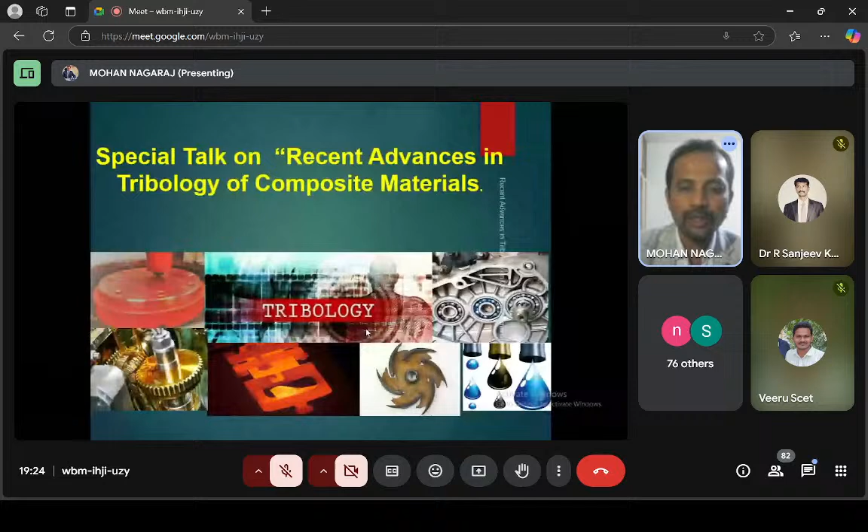So the introduction of tribology. Tribology means it is the science and technology of interacting surfaces in relative motion. It means one material rubs with another material, and there is progressive loss of the materials. It is called tribology. It includes the study and applications of the principles of friction, lubrication, and wear.

Tribology is the interaction of solid or composite surfaces exposed to interfacing materials and environment, which may result in losses of the materials from the surface. It is also loss of materials in lubrications, in the hip joint it is also loss of the materials. So these are all losses of the materials.

How to improve the wear losses? How to improve the wear resistance of the materials to avoid the losses in many applications.

So tribology means not only in the case of engine components or any environment, it's a process. Loss of materials is known as wear.

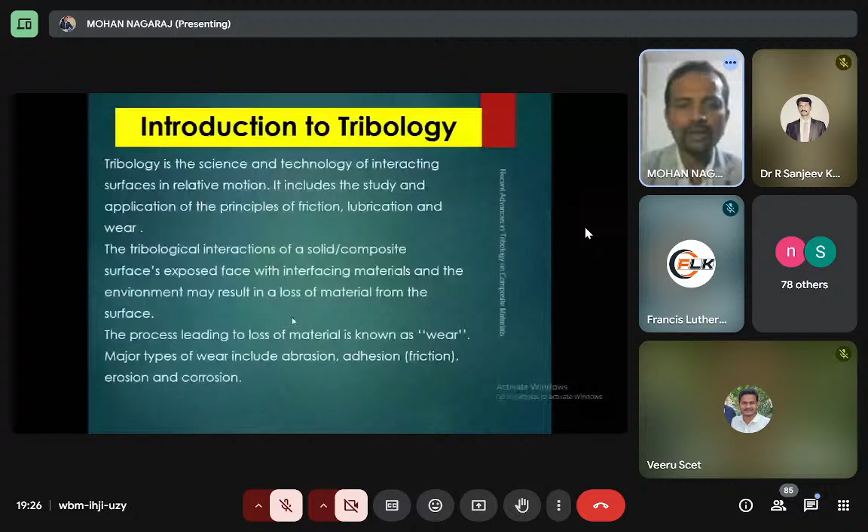So tribology means not only tribo. Tribo means there is some mechanical application on the components by means of pressure, by means of compressive force, or by means of tensile force.

There is a loss of materials taking place in different seals, gears, bolts, nuts, bearings, cams, wheel brakes, clutches, impellers, wheels, etc. These are all automobile components.

Some of the wheels have high friction coupled with low wear, as in brake pads and clutches. Sometimes the friction will be low with good wear properties under dry sliding conditions, again with smooth metallic counterparts.

For example, friction in bearing oils and gear conditions, engine oils in the gears - in automobile sectors we generally use oils and lubricants, but not in the case of brake pads and clutches. So generally, wear means it is the interaction.

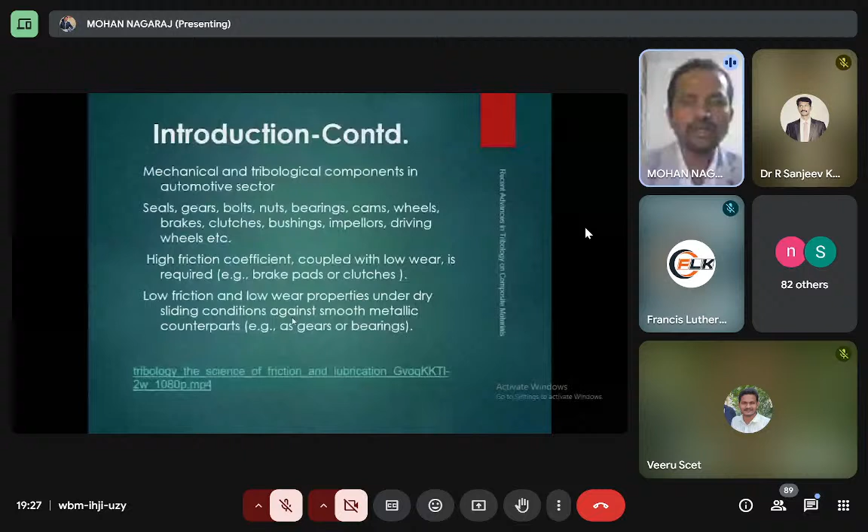So wear resistant materials are used in brake clamps, clutches, tires, and shoes - frictional heating, for example, initiating a fire by prehistoric peoples, and also in brakes, etc.

Simple example: eraser, friction surfacing - we are not using any lubricants, just enhancement of adhesion by means of the rubber, like an eraser, it's a material applied by pressure.

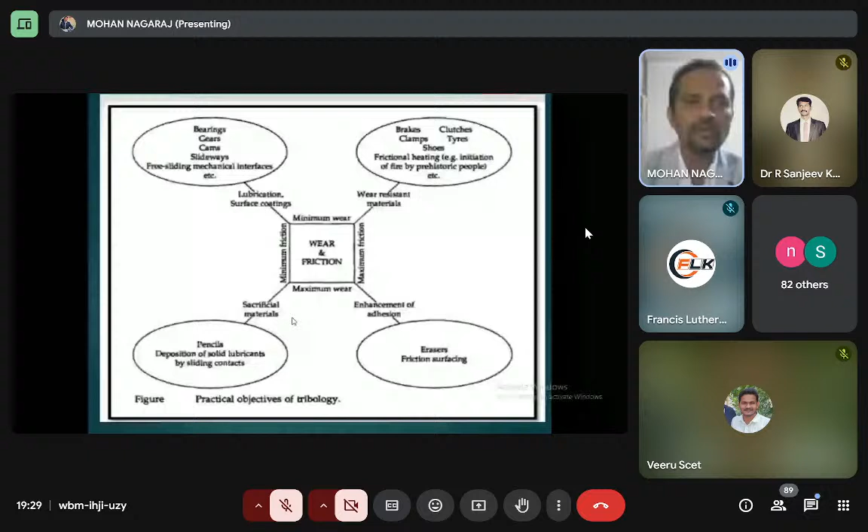So in our presentation, this is a special talk we are going to present, through understanding the tribological properties. Generally, as per our talk, it is related to composite materials.

First, let us understand what composite materials are. Composite means it is the macroscopic combination of two or more materials. It is called composite. There are different types of composite materials.

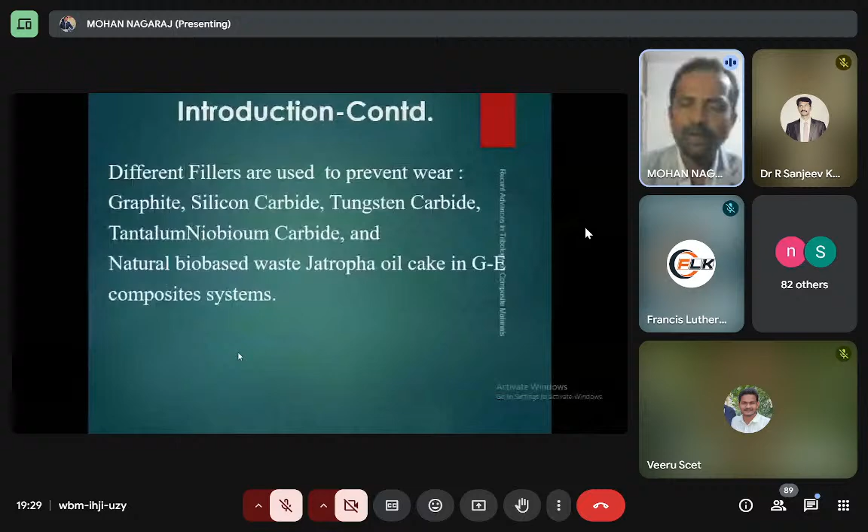In nature there is natural composite. In nature it is shell - in the seashores, calcium carbonate and its mixture. It is also one of the composite materials.

In general, composite materials are man-made composite materials. Recently it is used in aerospace applications. So generally, it is using glass epoxy composite. Generally, epoxy is one of the major usages of composite materials.

Usage of composite materials at present technology and present science also includes Kevlar fibers and carbon fiber. It is also one of the major applications in aircraft sectors - carbon fibers and also Kevlar fibers.

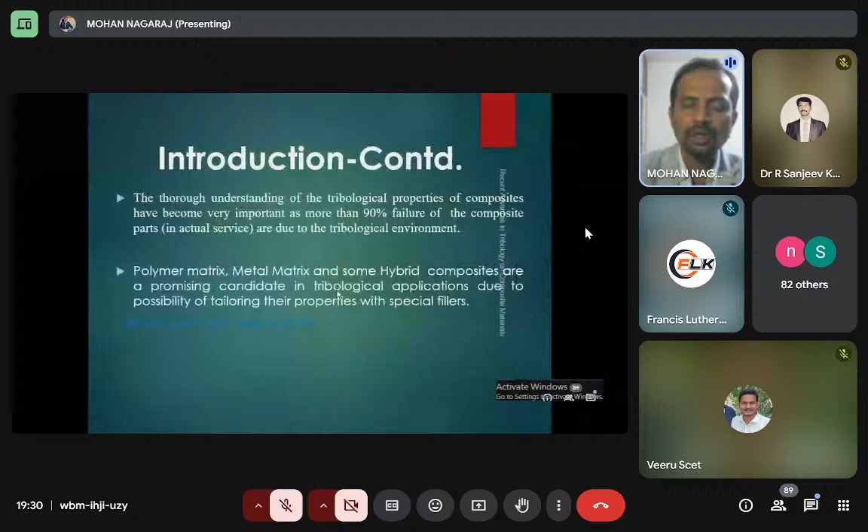So nowadays there is natural composite. Jute is one of the composite materials being used - jute, sisal fabric, sisal materials, areca fiber. These are all the materials used in the inner part of automobile sectors, and also in aerospace sectors. In shipbuilding industries it is also more being used.

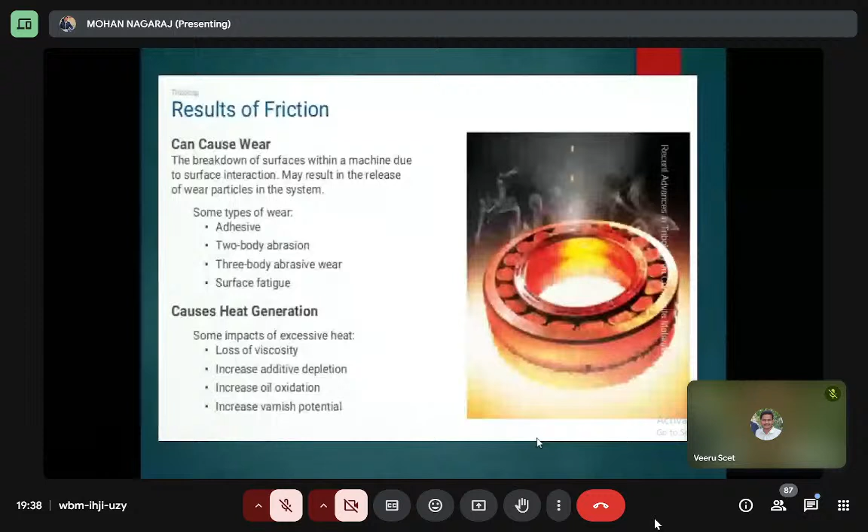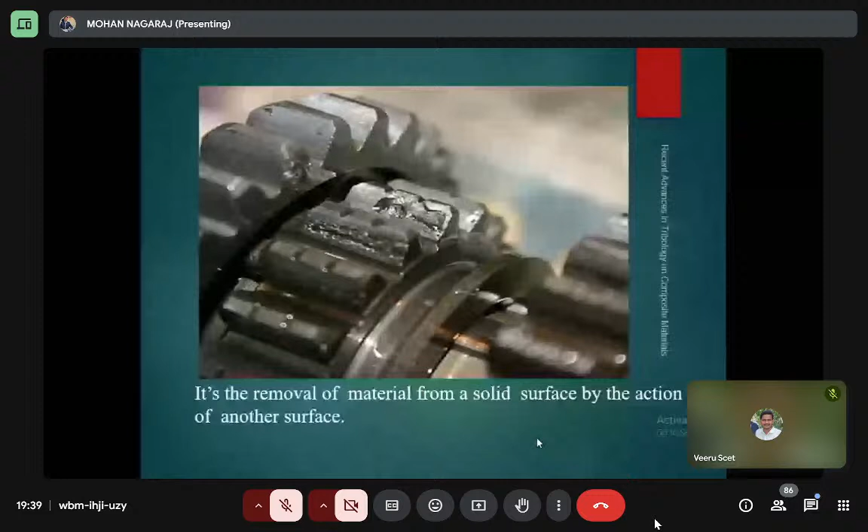So it's material removal from the solid surface by means of actions of another surface. It is the propagation of cracks, and the material will be fractured, in general, in the material.

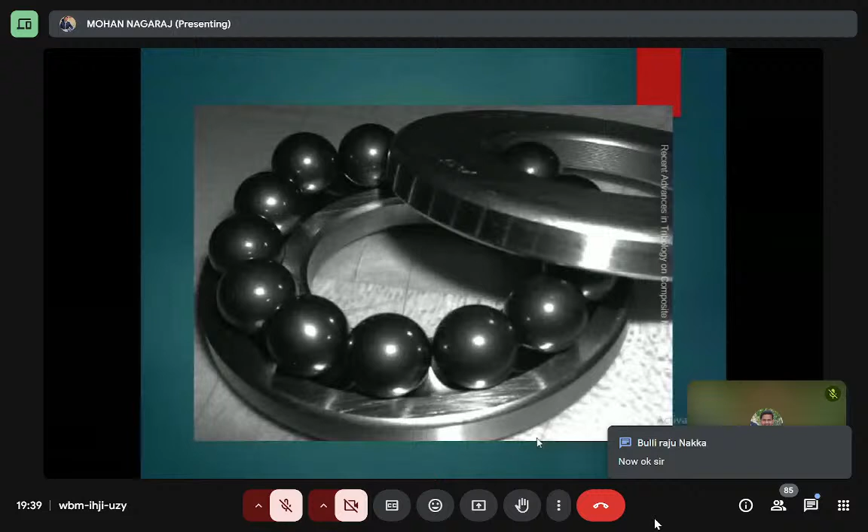Similarly, applying lubrication in between the balls and bearings, there is a bearing liner material, which is a composite material. Polytetrafluoroethylene is one of the materials. It's made up of glass fabric reinforced with polytetrafluoroethylene. It gives self lubrication in the bearing liner material.

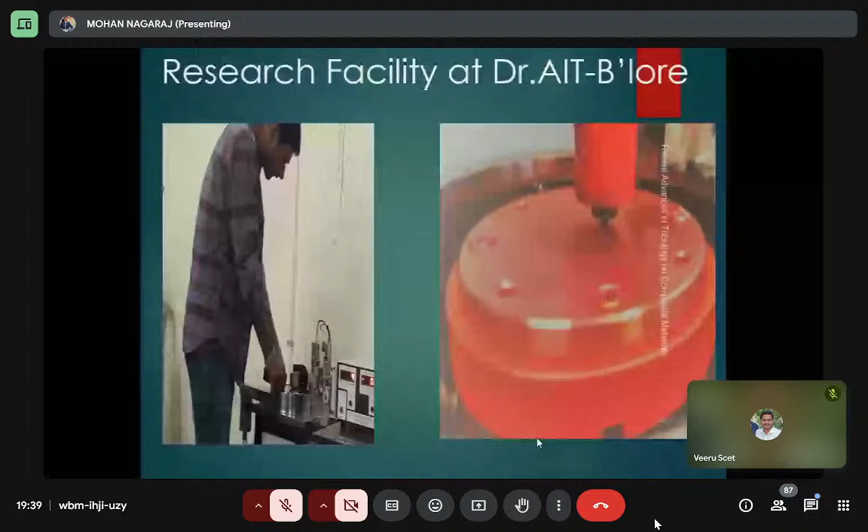So instead of lubrication, we are introducing a bearing liner. There is a research facility in our college: a pin and disk machine. We can test composite samples in the pin and disk machine, and erosive testing is also possible.

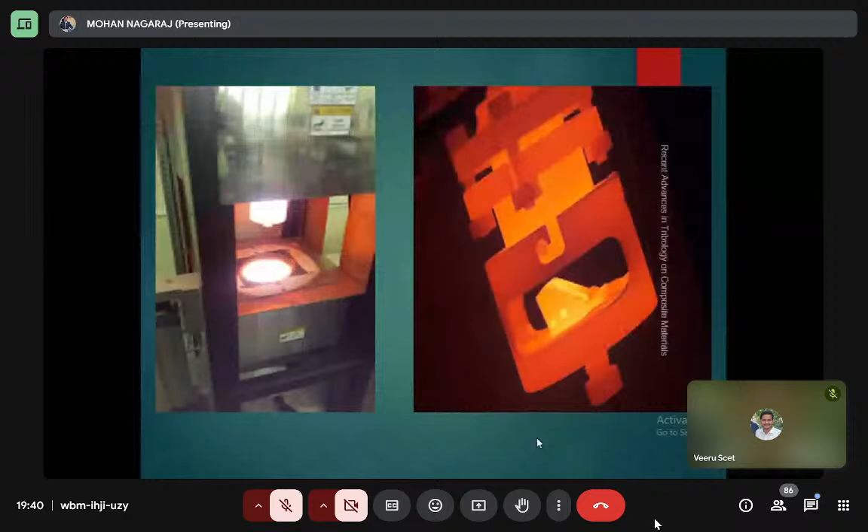There's a possibility to test erosion in high temperature environments. There is solid particle interaction with micromechanical actions of the solid particles interacting with the surface. There is progressive loss of materials, meaning the impact of solid particles generally removes material from the solid surface. Such a testing facility is also available. This is erosion, where erosion will take place.

I will show, before this, a two minute video. I will share the video.

We are Society of Tribologists, leading researchers in the field. Hello, visible? Sir, visible? Yes, sir, yes sir.

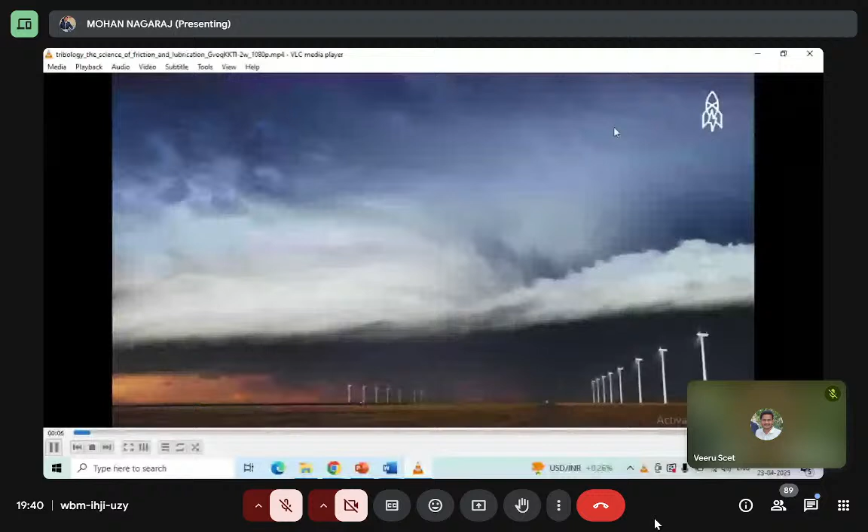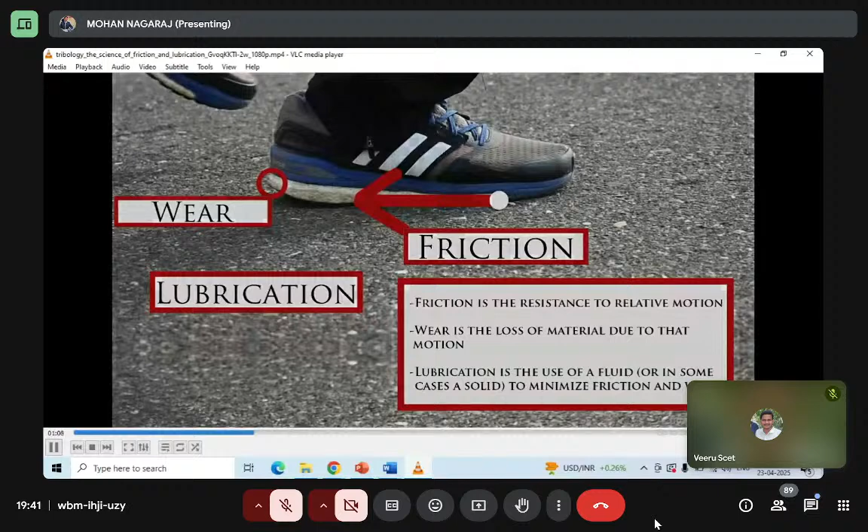Hear the word tribology, but you can see tribology in action on a daily basis with cars, wind turbines, and in sports as a few examples. You'll see it best in applications with sliding, just like here, where if you zoom in with microphotography, you'll see the top steel plate sliding across oil. As you can see, the oil separates the two steel surfaces. This right here is tribology. It is the study of surfaces moving relative to one another. So when surfaces are rubbing together, we tribologists look at three things: friction, wear, and lubrication. Friction is the resistance to relative motion. Wear is the loss of material due to that motion, and lubrication is the use of a fluid, or in some cases a solid, to minimize friction and wear. Now the cool part is seeing tribology come alive through our research. Check this out. When your finger rubs against the surface, basically the sliding force of your finger acts against the friction from the surface. Now with our research, we can put numbers to that friction. Watch this. Instead of a finger, let's look at a steel ball rubbing against a steel plate.

As the ball rubs across the surface, data is being collected. At every location, we are getting the coefficient of friction. For example, at one location, the friction coefficient is around 0.17, and at another location, it's 0.15. Altogether, the data shows the average coefficient of friction is around 0.16 for the surface.

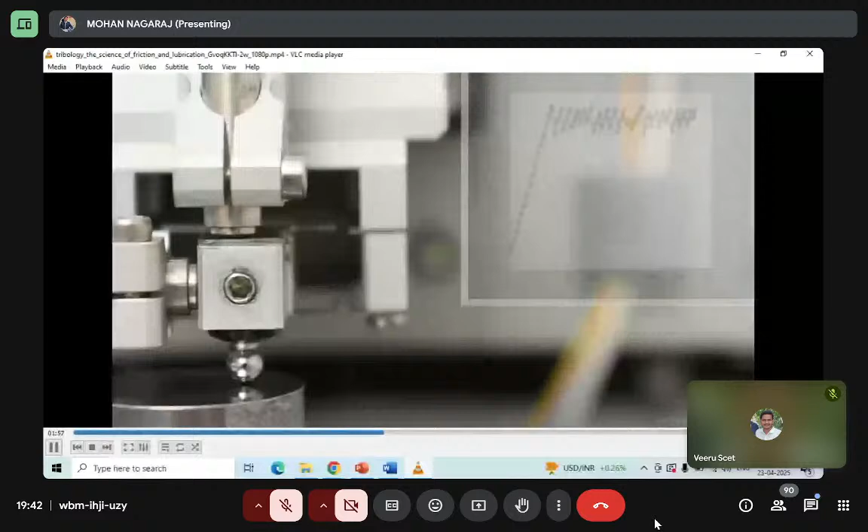You can think about what you've learned in class and apply it. How can we control friction? How can we control wear? Can we apply lubrication? Today, our research group helps answer these questions.

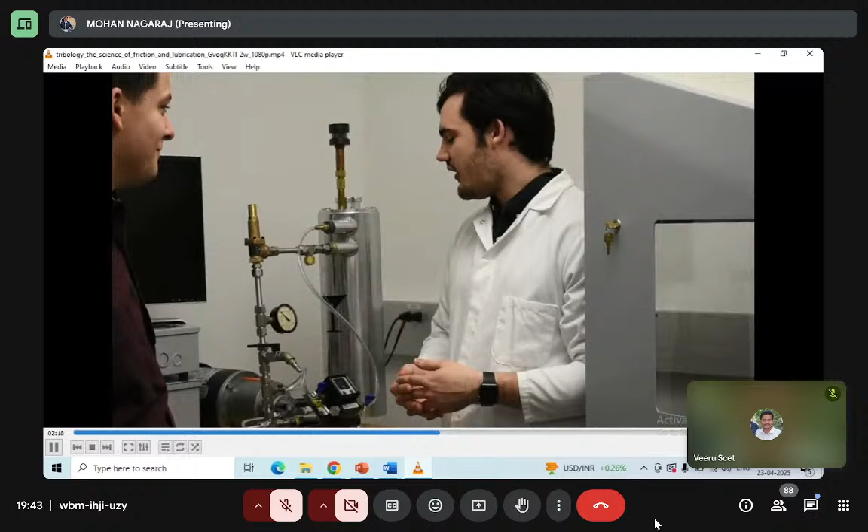Each sample we create here has different additive combinations, meant to keep the oils stable throughout varying temperatures and in the long run. We also make sure these oils don't produce foam. Once foam starts developing, you have bubbles which exclude the oil, and the materials rub against one another, producing wear, and you lose energy from friction.

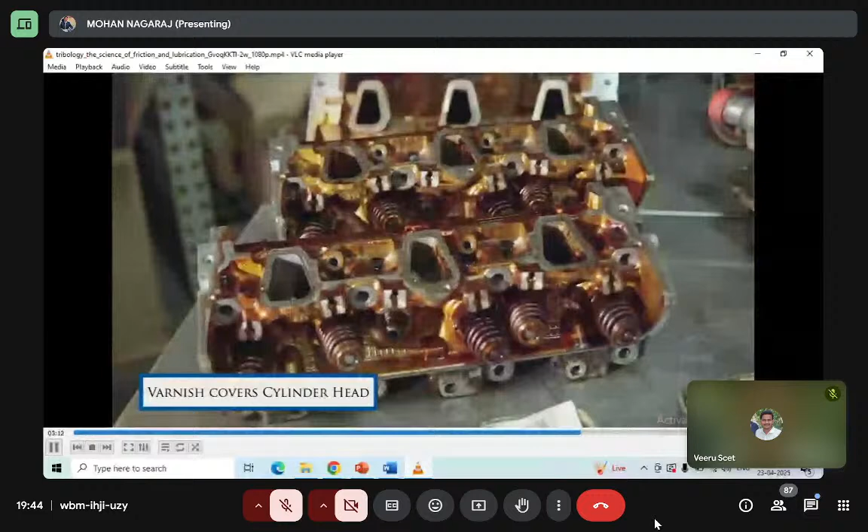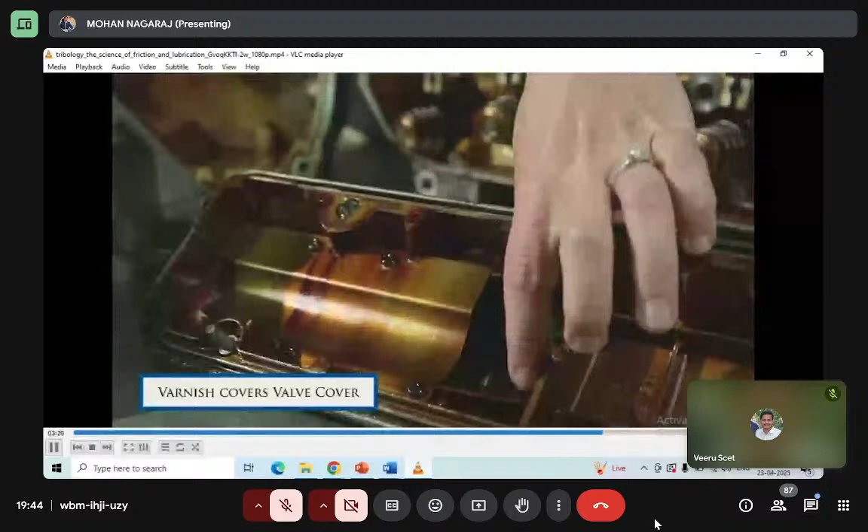Oil degrades, and one of the main degradation channels is oxidation. This is a problem across every industry, the transportation industry and the power generation industry. We take artificially degraded oil on a steel component, expose it to differing chemicals and environmental conditions like temperature and flow rates, to see if we can remove the varnish.

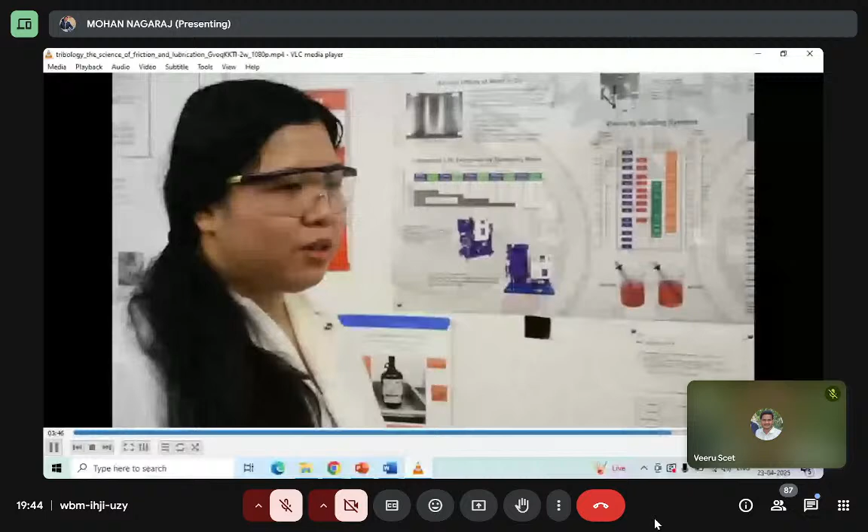I work with lubricants. That's my topic in tribology, in that giant umbrella field. With my computer science knowledge, I do simulations. I model base oils, essentially oils that formulate lubricants, and calculate their viscosity. Ultimately, if we can predict viscosity using computers, that would be really helpful for formulating new lubricants.

As you can see, tribology is both technologically relevant and scientifically fascinating. One thing's for sure: get ready to be a part of this growing field of research.

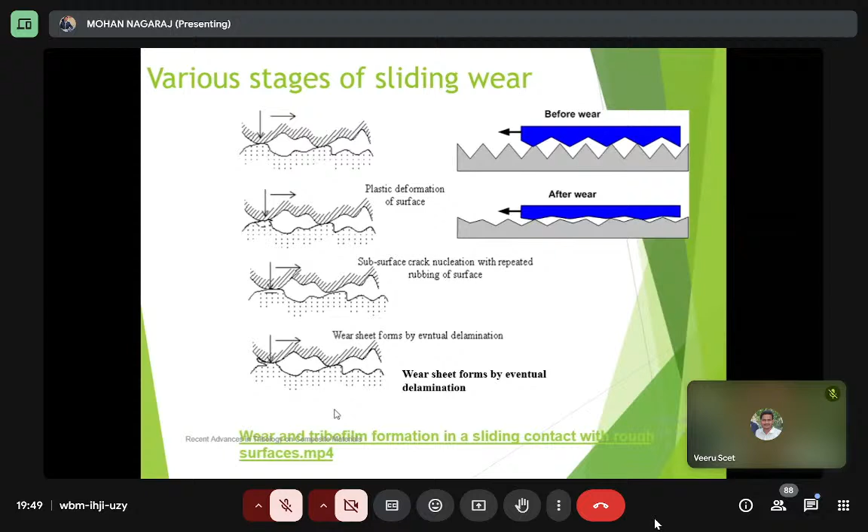Okay, so this is the various stages of sliding wear. I hope all of you can see in the shape. So abrasive wear: two body wear and three body wear.

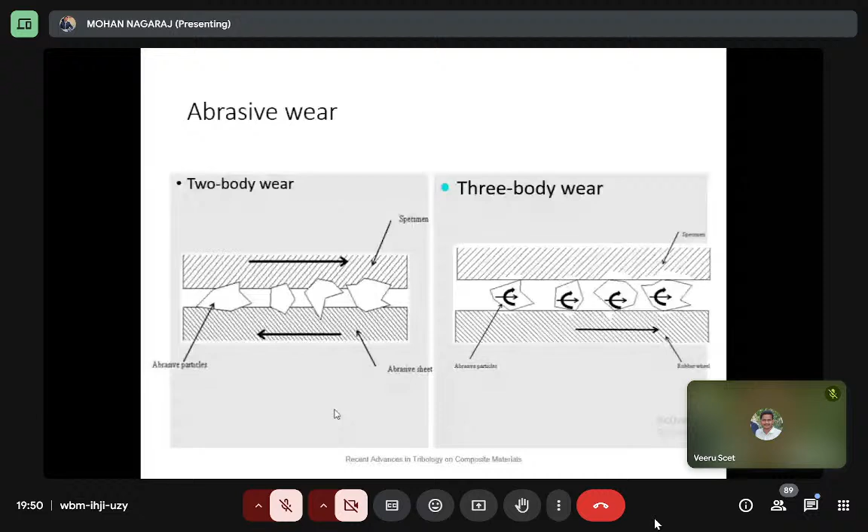Two body wear means there are particles, abrasive powders that will be fixed in the particular junction. And three body means there is movement of particles between the two bodies. So erosive wear mechanism: properties of the target materials are composition, structure, fiber filler matrix, and erodent.

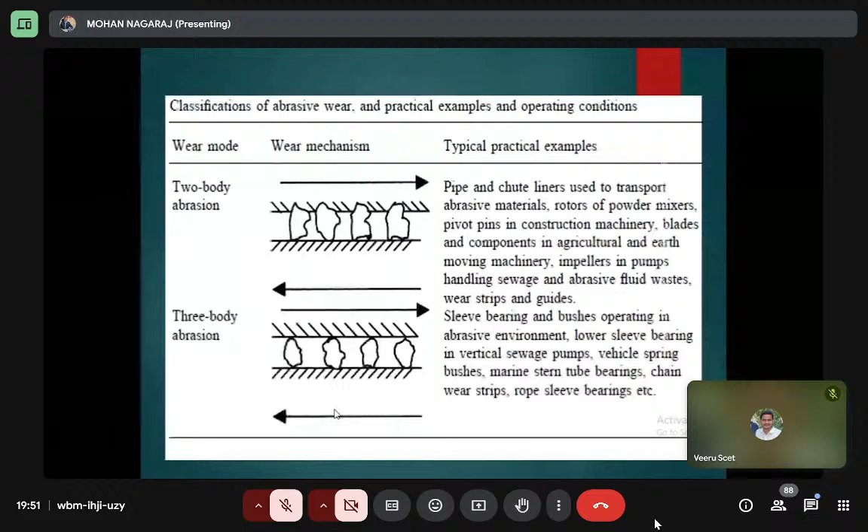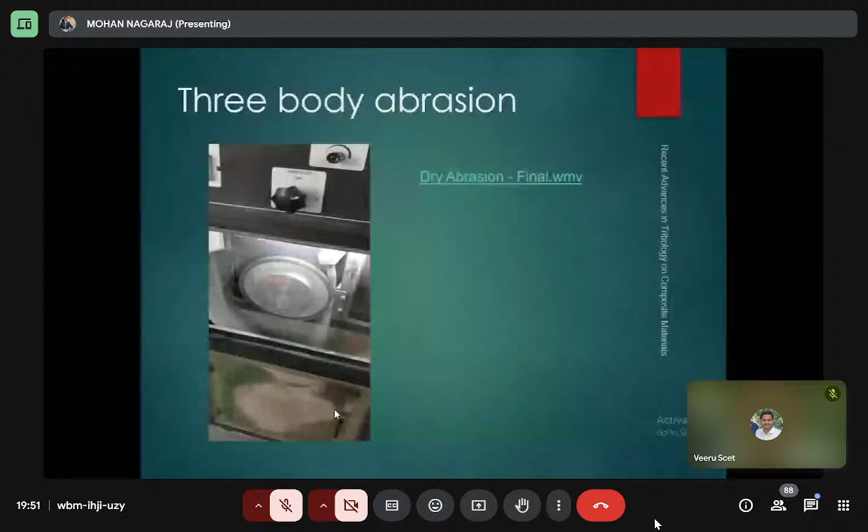I'll show this video after the session. This is erosion in vehicles and plants - aircraft moving in the desert environment or in the open atmosphere.

So the rotor blades and jet engine turbine blades are also worn out. These are the causes of damages - it is due to dust and sand, and also radomes. It covers the radar, it's called radome, and damage will also take place. Wing leading edges are also damaged.

Satellite surfaces face atomic oxygen and space debris. In power plants, generally piping, fitting, cyclones, valves, and also turbine blades. In boiler plants, damages occur due to charcoal moving at different velocities.

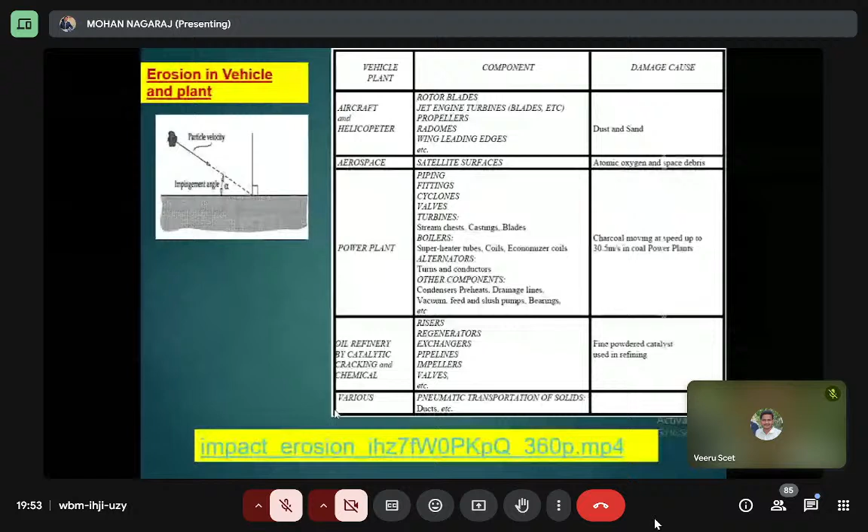In the oil refinery and chemical plants, there is riser, regenerators, exchangers, pipelines. A fine catalyst is used in refining. Here erosion is also chemical in the environment due to chemical reactions, and oxidation takes place, forming a film on the surface of materials.

This reduces the strength of materials after a prolonged period of time. This is known as corrosion, where it will take place.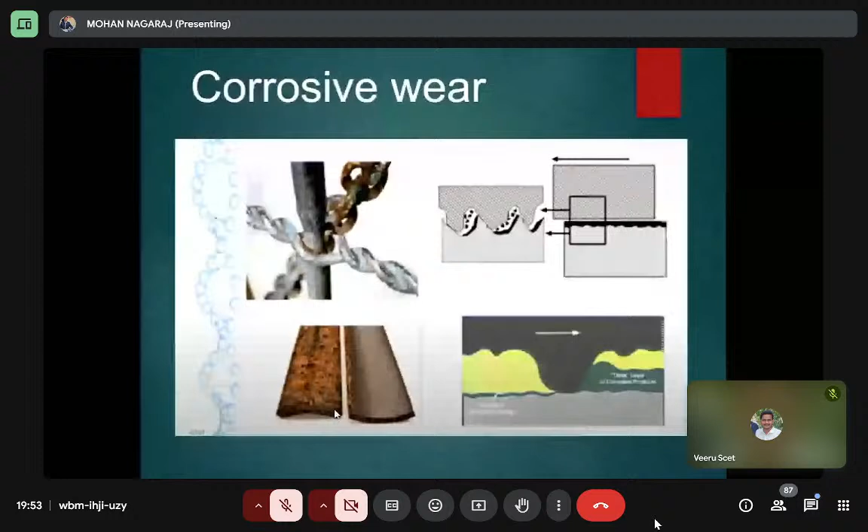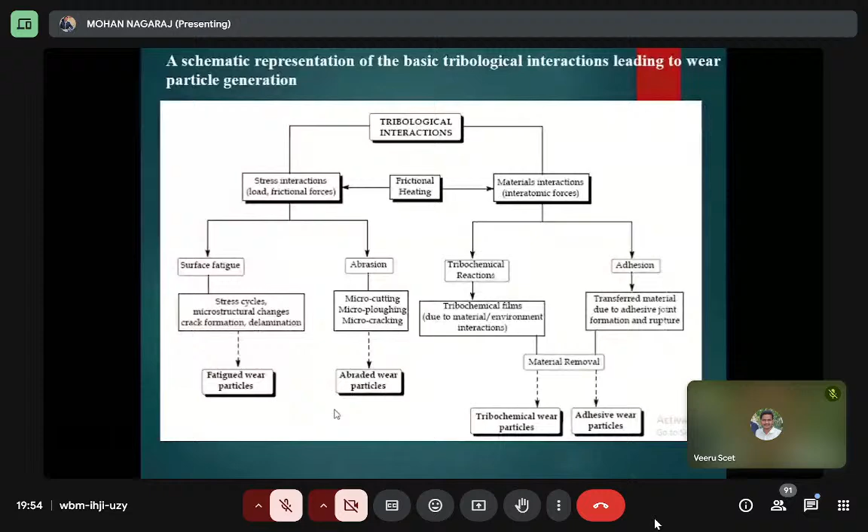So, adhesive wear particles - this is the general applications of fiber reinforced plastics in different fields, such as bearing liners. Polytetrafluoroethylene materials are used in the case of bearing liner materials.

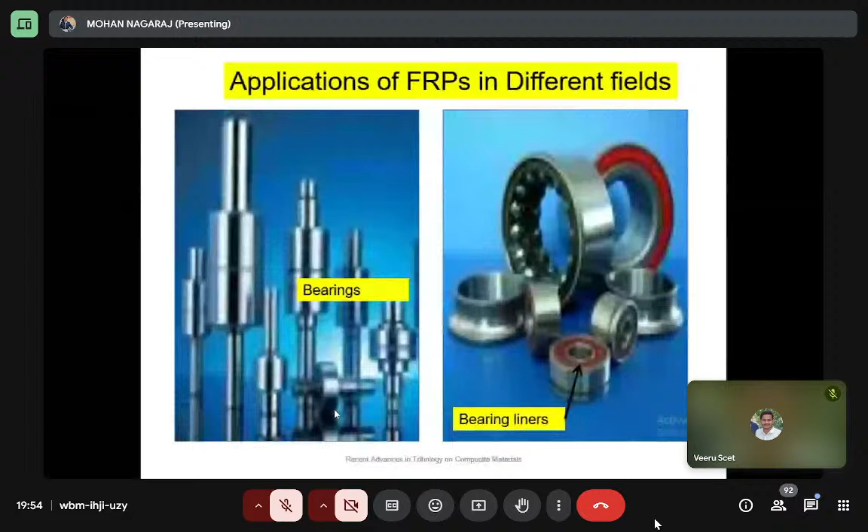Generally, instead of oil or ink, self lubrication takes place. This is generally made from composite materials. Applications of fiber reinforced plastics in different fields.

It is used in wind turbine blades, chemical pipes, pipelines - on all surfaces, where wear and tear will be taking place in the materials. To avoid such things, we are using some kinds of filler materials in the polymer matrix composites.

Applications of FRPs in different field sections include helmets, and electrical applications are also using it. In tires, they are using some kinds of fillers. In aerospace, marine applications, sailboats, automotive and other applications in chassis, carbon fibers are used.

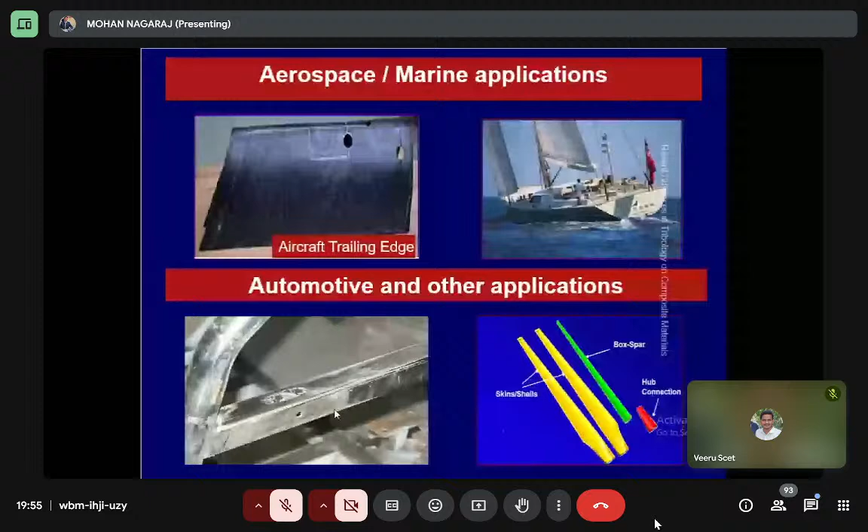They are used generally in automotive and other applications, and also in bumpers in trucks - materials called fiber reinforced synthetic fibers are used.

So in the present investigation, the role of graphite - graphite is one of the non-metals but a good conductor of electricity, and it acts with self lubrication properties in the material.

Silicon carbide and tungsten carbide are hard powders also introduced in the polymer matrix composites. This enhances the wear resistance properties, studied in sliding wear, abrasive wear, and also erosive wear environments.

So generally, Jatropha is one crop under cultivation. After crushing the Jatropha, it is used like diesel in the engine. After obtaining the husk from Jatropha, those particles are also used in glass epoxy composite materials with different combinations and percentages, which also gives enhancement in wear properties.

Mechanical properties were also studied, sliding wear behavior was also studied, and solid particle erosive wear behavior was also studied using filler-filled glass epoxy composites.

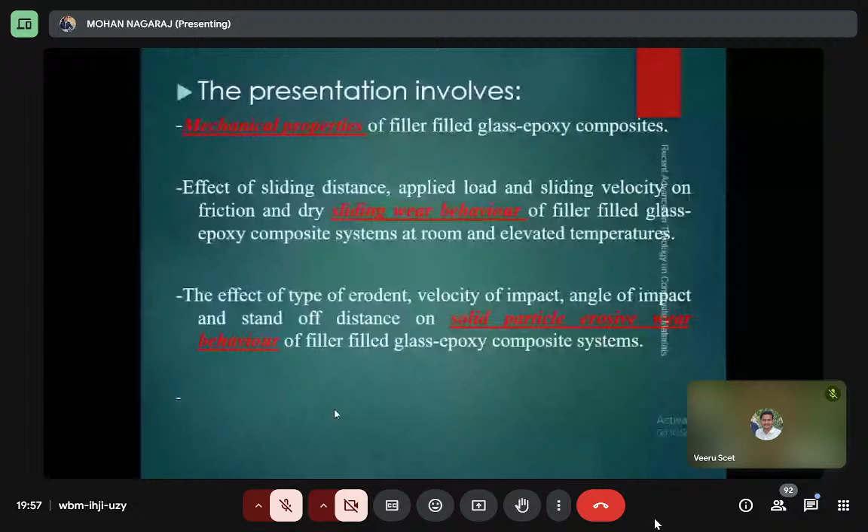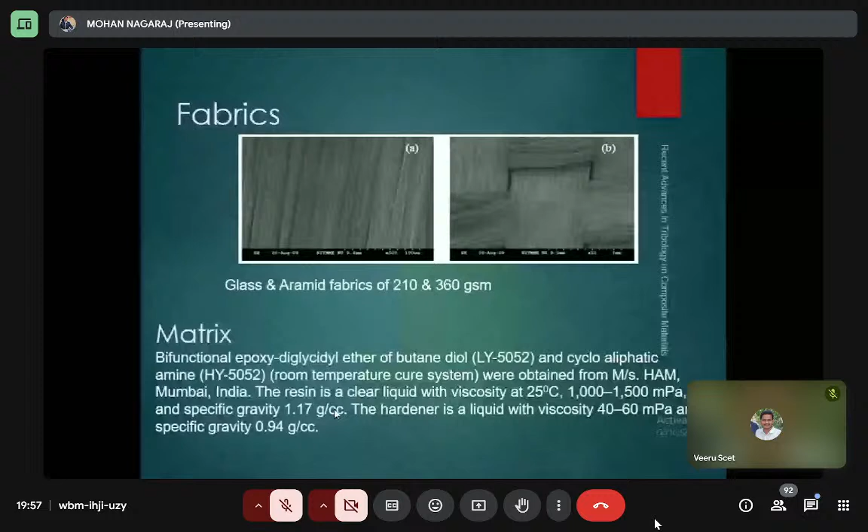Before fabrication - glass and aramid fabrics of 210 and 360 GSM, using a bifunctional LY epoxy. Epoxy matrix material is used for the fabrication of polymer matrix composite materials. Filler materials are used in this study, purchased from different organizations.

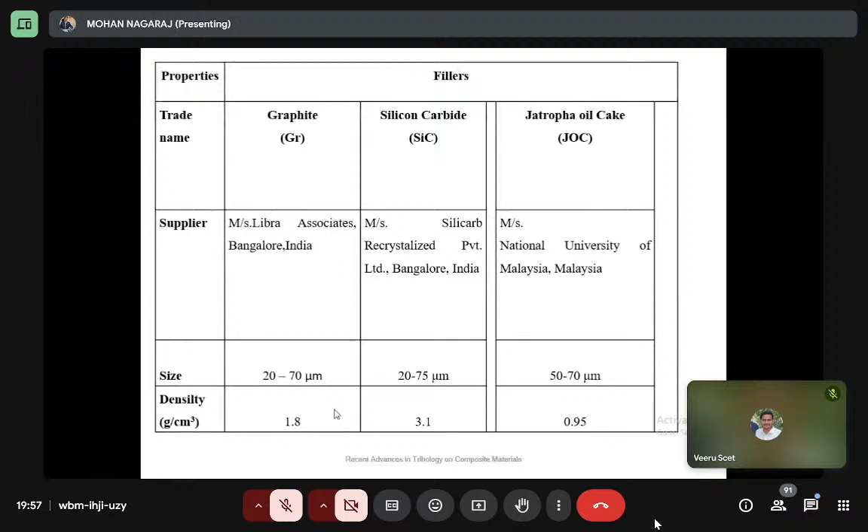Next, the fabrication methodology of nanocomposites - if you use nano fillers, it is called a nanocomposite. If you use micron level fillers, it is called a general composite material.

Fabrics are cut into required dimensions and placed in the mold, mixing the epoxy resin with the filler. Epoxy is generally an adhesive - what you use for joining pipelines and such things, that is the material called adhesive, similar to epoxy.

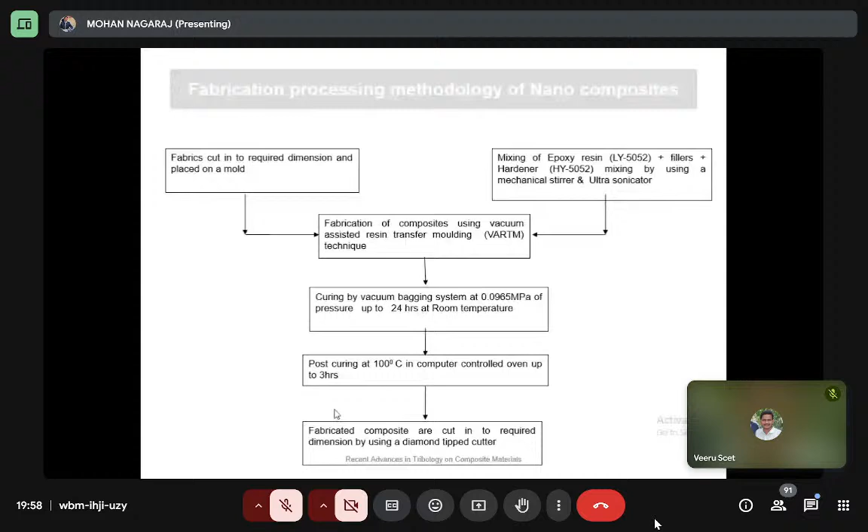These are manufactured using vacuum-assisted resin transfer molding technique, then cured by a bagging system at 0.0965 megapascals for up to 24 hours at room temperature, and then post-cured in an autoclave up to 100 degrees Celsius in a controlled oven for up to 3 hours.

Fabricated composites are cut into required dimensions using a diamond tip cutter. So after this is the schematic diagram.

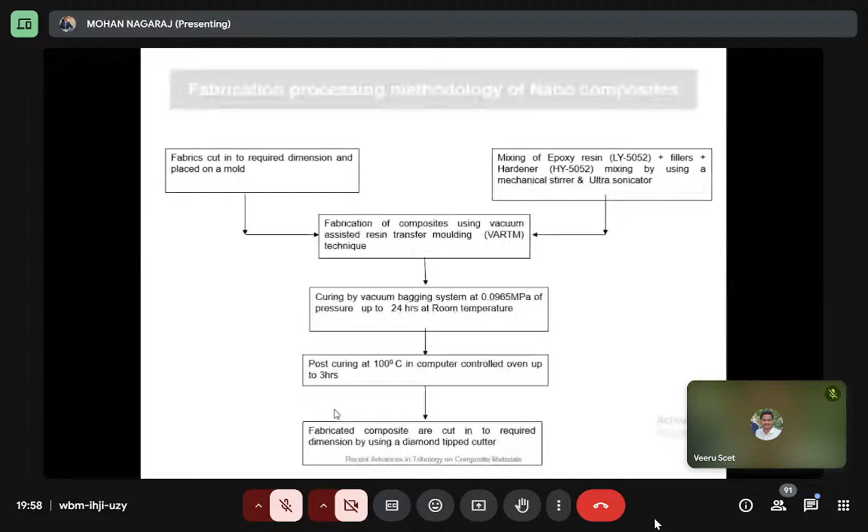The filler is ultrasonicated in the resin. After that, you are pouring these materials into fabrics. After that, the fabric is cured in the hot compression or vacuum assisted resin.

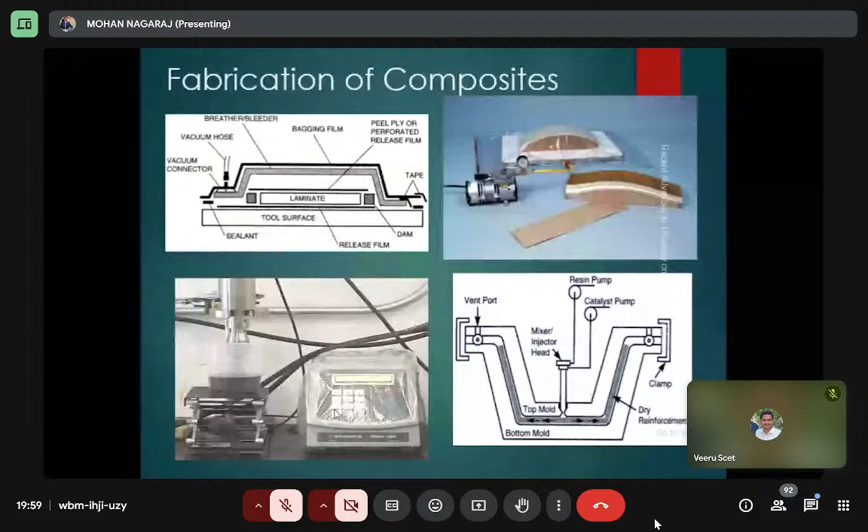One of the technologies used in the aerospace sector for the past 20 years involves a granite molding tool, dry glass fabrics or Kevlar fabric, any type of fabric, with peel ply and breather material on one side. The vacuum sources suck the resin, which is mixed with some kind of filler, then vacuum is applied. The pressure develops between the fabrics, so the material becomes embedded in the breather, and excess resin is observed in the breather outside the materials.

Following ASTM standards, tensile, impact, and wear tests are conducted.

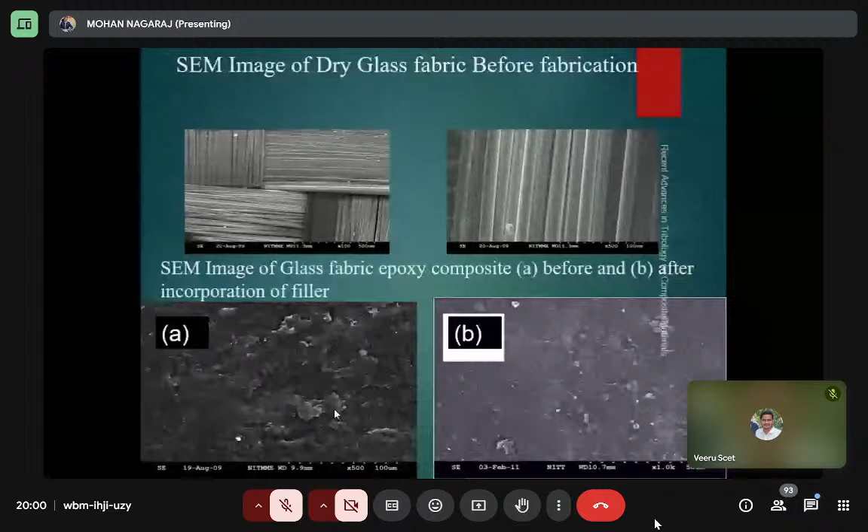These are SEM images before fabrication and after fabrication, after incorporation of the fillers in the materials. Here the impact strength is studied for filler-filled composites. Graphite gives more impact strength and more hardness compared to normal glass epoxy composite materials. These are the test conditions: dimensions of the specimen, applied load, angular speed, sliding diameter, and sliding distance.

These are all general simple parameters. We are not using any orthogonal array or other techniques here. The disk is made up of 55 HRC. This is the high temperature pin-on-disk machine, available at the National Institute of Technology and also at Dr. Ambedkar Institute of Technology.

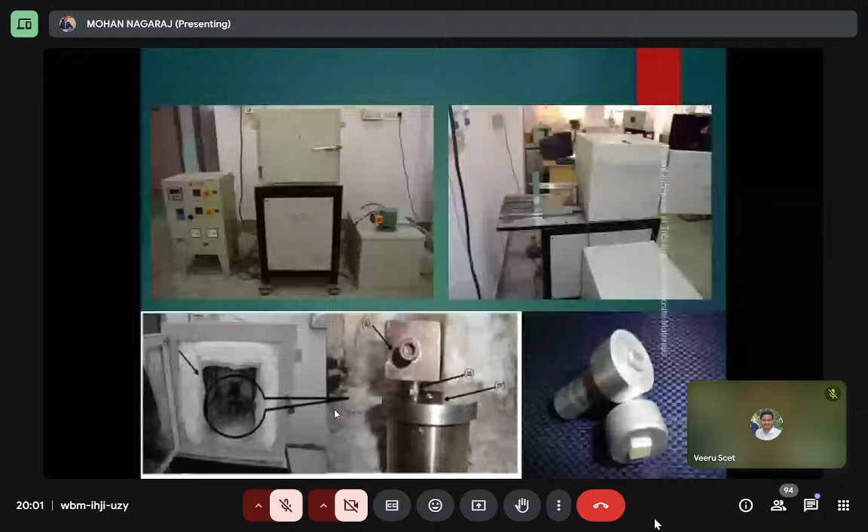Small pin samples are made and fixed in the holder, then run according to the load, which is 10 to 20 Newton, with revolutions set at a fixed value for the sliding diameter. pi DN by 60, and velocity is set. So this is the material.

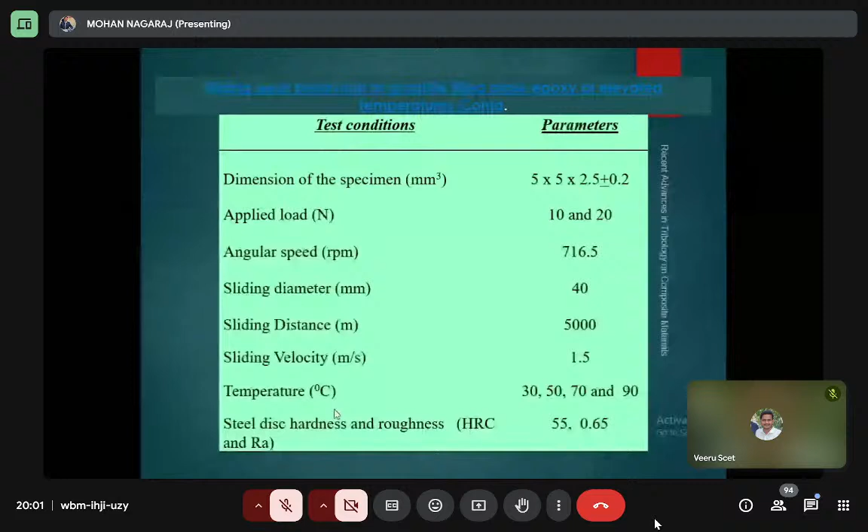We weigh the sample to get the weight loss of the material. The weight loss is tracked at different temperatures for the polymer matrix composite. It gives very good wear resistance compared to general materials, because lubricant-like materials such as graphite enhance the wear properties of the materials, giving very good wear and tribological properties. Generally, these kinds of materials can be used in bearing liners.

Instead of polytetrafluoroethylene, which is costly, why use filler materials? For cost reduction. Incorporating filler materials for the polymer matrix composite gives cost reduction and also improves the mechanical and tribological properties.

Here we studied up to 90 Celsius, but we can go up to 200 degrees Celsius depending on the matrix. Since epoxy is the matrix we are using, it withstands the glass transition temperature of the epoxy matrix up to 150, 160, or 120 degrees Celsius. If you use a phenolic composite, you can use it up to 300 degrees Celsius, possible for engine components of the matrix.

This is the specific wear rate versus temperature. Here, glass epoxy composite versus graphite-filled composite: the graphite-filled composite gives a very good specific wear rate, initially drastically lowering the specific rate. After increasing the temperature, the specific rate also increases, but it remains low in this graphite-filled composite.

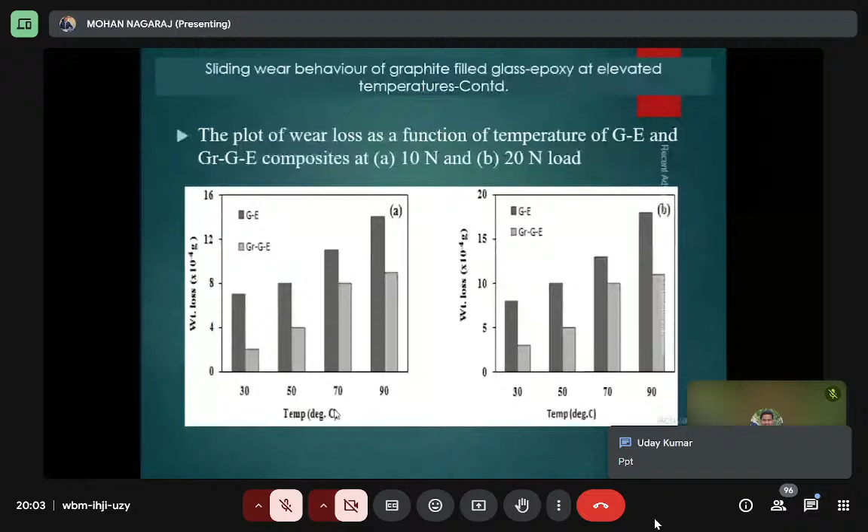Coefficient of friction is also a very important phenomenon we studied in the graphite-filled composite materials. Graphite-filled composite gives a lower coefficient of friction because, as a solid lubricant, it forms a thin film between the two components. This enhances wear resistance and the thin film formation between the composite specimens gives good lubrication properties. There's no need to add any extra lubrication; it's inherent in the property of the materials.

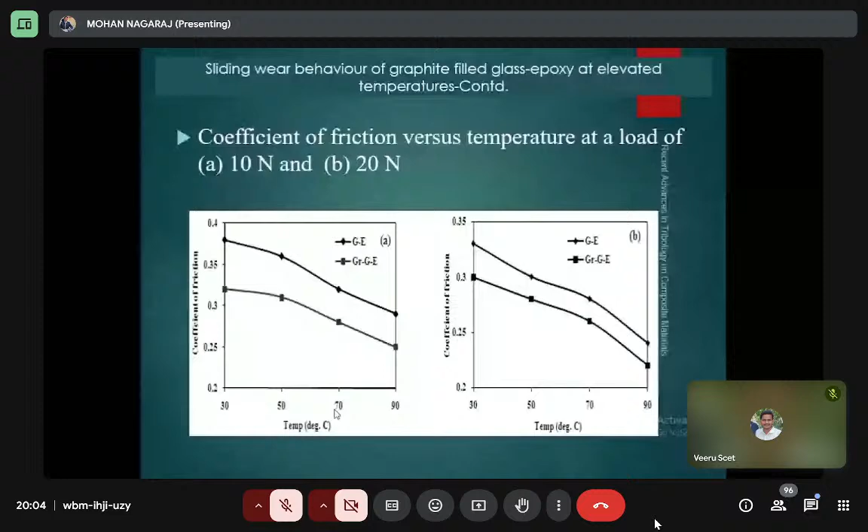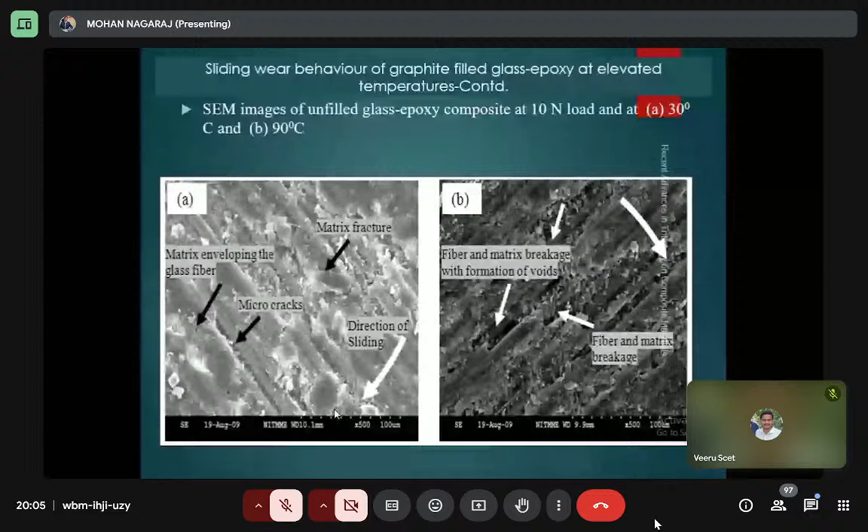At higher temperatures, the damage becomes greater. Higher damage shows broken fiber ends in the form of chipped features and worn out main layer damaged surfaces.

Some images again of filled glass epoxy composites, and this one of graphite filled composite. It gives very good lubrication properties and also protects the polymer matrix composite from wear, making it more wear resistant because of the solid lubricants, and also reduces friction between the two materials.

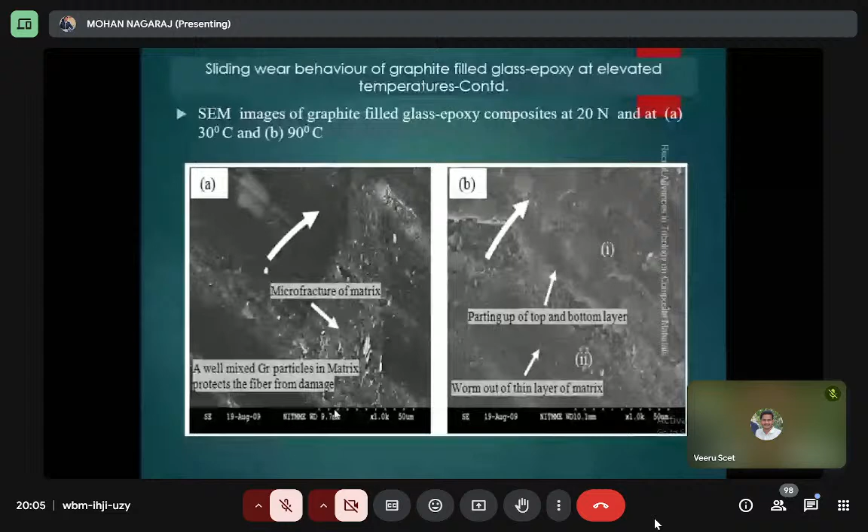So the summary of this kind of testing, this kind of research with applied load - the wear performance of unfilled glass epoxy composite showed strong wear mechanisms, which we observed.

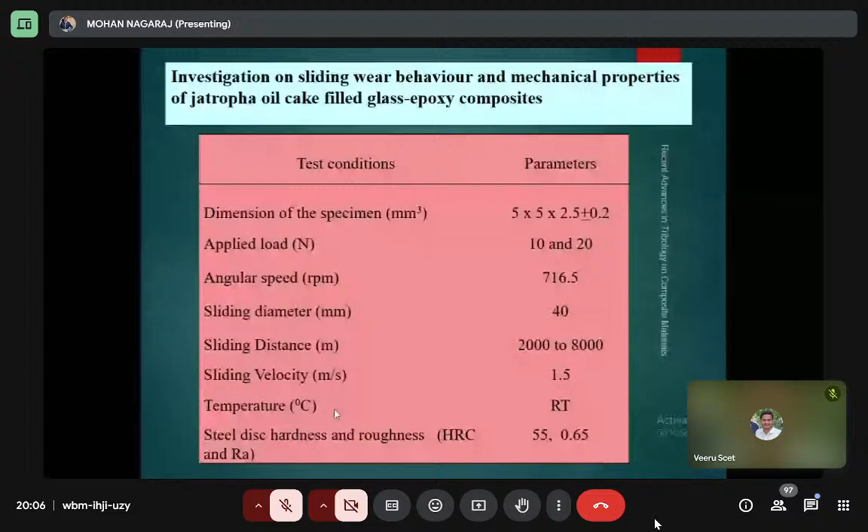Again, the investigation involves introducing Jatropha oil cake material in the same sliding conditions and same parameters at room temperature, not high temperature. We observed this glass epoxy composite with filler as Jatropha up to 6%.

This is the natural composite with natural filler. After extraction of the oil from the Jatropha, we are using the Jatropha oil cake powder as filler.

These specimens were tested according to ASTM standards. Here is the Jatropha filled material, and A is the general composite material compared to the filler filled one.

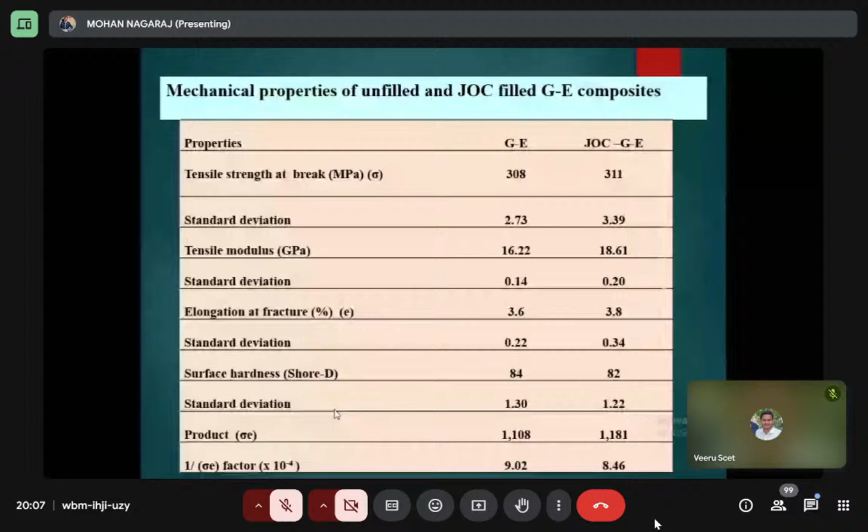We see debris and also fiber pullout, fiber reinforcement - all these things, compared to normal composites, show more mechanical enhancement and more mechanical strength in the filler filled Jatropha natural composites in the polymer matrix composite materials.

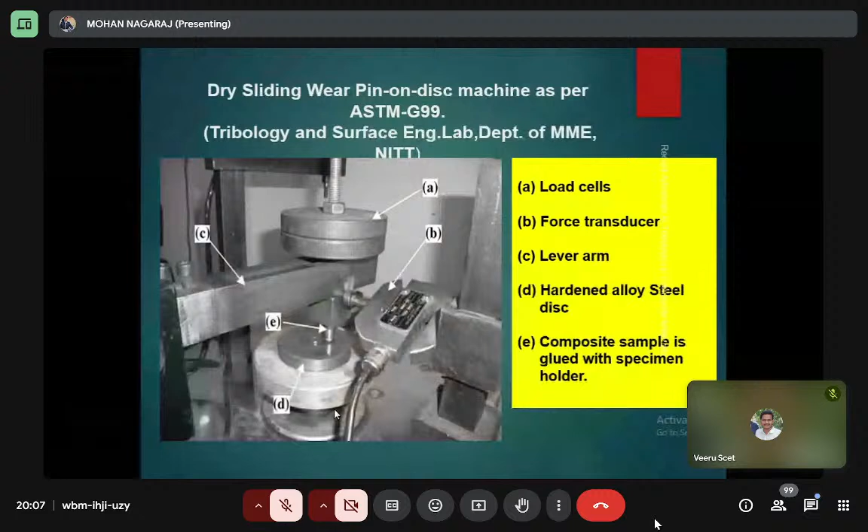Force transducers, lever arm, and all those things - the samples were tested in different environments. JOC-G-E is tested at 10 Newton and 20 Newton loads.

The wear loss, or the wear rate - the JOC filled composite gives very good performance up to 8,000 meters of sliding distance. We studied these materials, and this is the specific wear rate.

There is a drastic reduction taking place in the materials, and then a linear reduction is observed from 4,000 to 8,000 meters. The drastic reduction we observed in both materials is because of the softening nature of the epoxy material initially.

There is more matrix present on the surface of the composite specimen. At initial contact, the specific wear rate is drastically reduced, then more wear loss takes place.

Here you observe the glass epoxy composite and JOC filled composite - it gives more wear resistance, shown in the specific wear rate. A is the lower Newton load, and B is the higher Newton load observed.

The coefficient of friction shows mixed fractions we observed, but compared to the glass epoxy composite, the oily nature of the Jatropha oil cake gives a very good coefficient of friction compared to the general composite material.

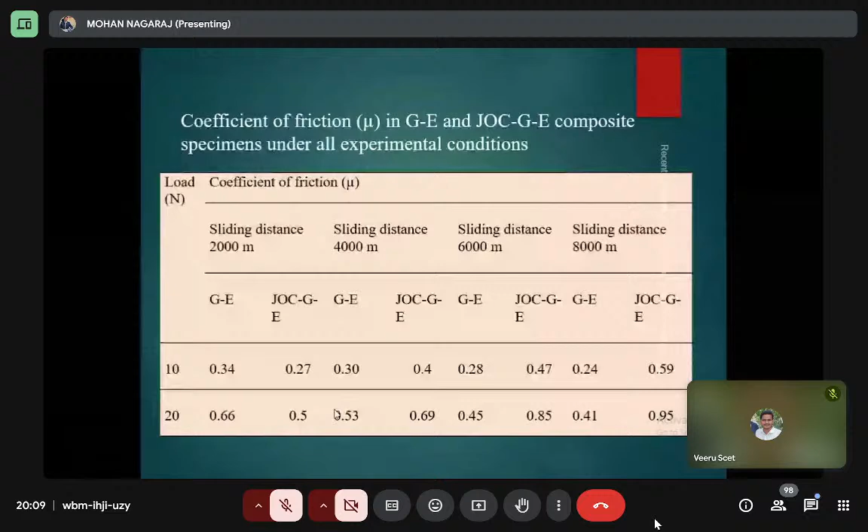These are the SEM images of the different composite materials, at lower distance and higher distance. Generally, at higher distance, the materials show more wear.

More damage is also observed compared to the lower distance. Also, if you apply more load at more distance, more damage will be observed in the image - matrix damage, void formation, fiber breakage in the form of chipped outer features.

Here we can observe more evidence of this in the scanning electron microscope images.

So the summary is that the natural filler material filled in the glass epoxy composite strongly depends on the experimental test parameters - sliding distance and applied load. Wear loss increases with increasing applied load.

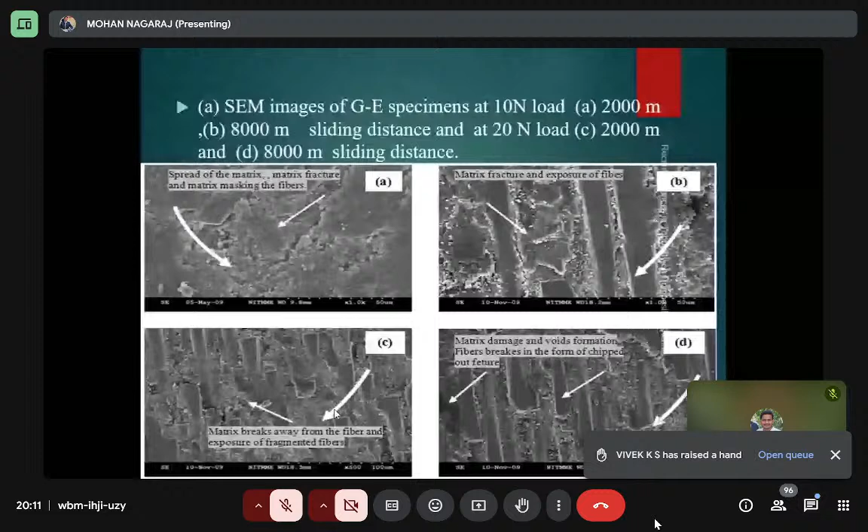JOC (Jatropha oil cake) is one of the natural materials in the system. Specific wear losses also decrease with increasing sliding distance. Changes in the coefficient of friction occur, but JOC filling lowers the friction, acting as a lubricant in the material. It has self-lubricating properties, making it possible to use these kinds of materials as bearing liners and in other applications.

Some of the major SEM images indicate matrix debris formation in the materials.

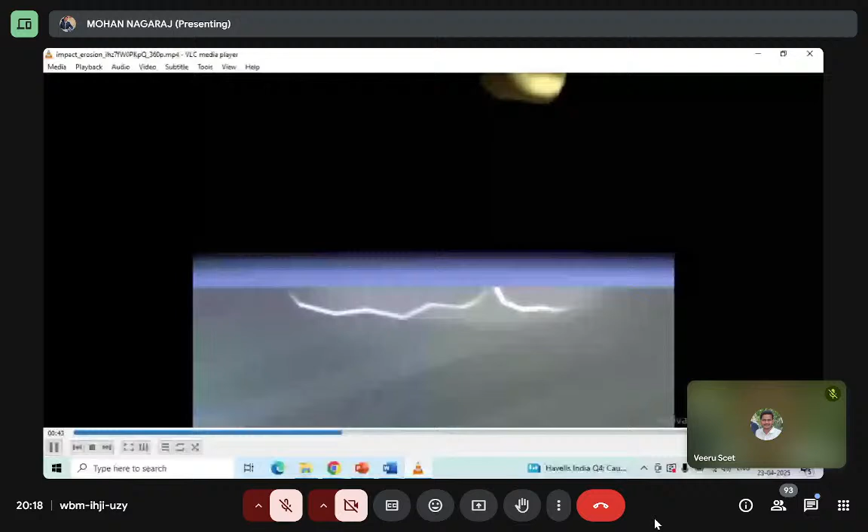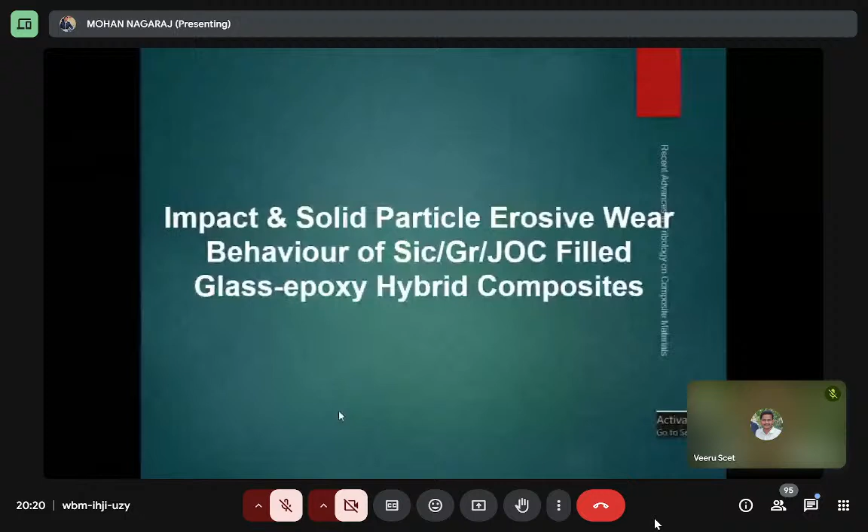When the vehicle is taking off or landing, dust particles interact with the surface. It is called silica interaction. The material becomes damaged. To avoid such things, researchers conduct investigations. Here, impact is also taking place.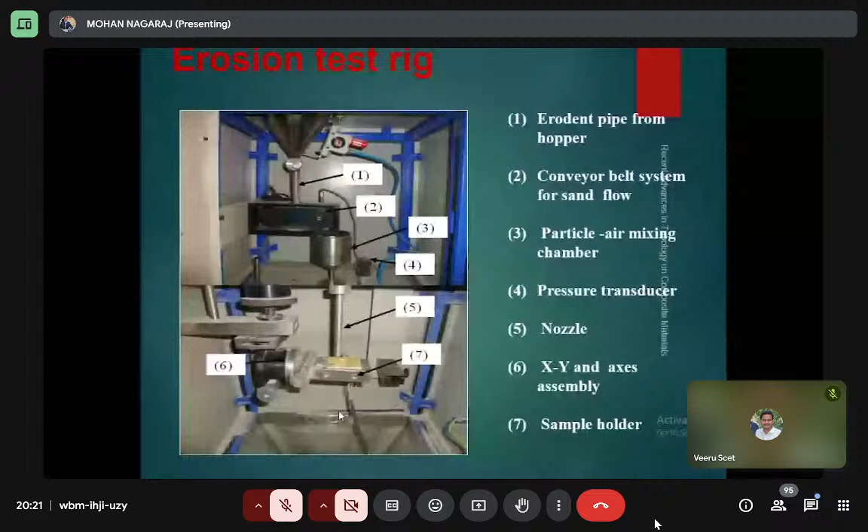Generally the impact is shown in these images we are observing. This is the erosion testing machine. Erodent pipe from the hoppers and also conveyor belt system. Particles mixing chamber, pressure transducers, nozzles, sample holder. Generally silica sand is used for the erodent.

These particles hit the parent materials, which are polymer matrix composites. Its size is measured, and mechanical properties are also checked.

The main property is impact, which is very important because erosion is a combination of impact. The impact strength is observed. The hard silicon carbide covalent bonding structure in the Jatropha oil cake (JOC) materials gives very good impact strength compared to JOC graphite, graphite glass epoxy, and pure glass epoxy composite.

Here, impact strength versus displacement in mm is shown. It is tested in the composite at the Indian Institute.

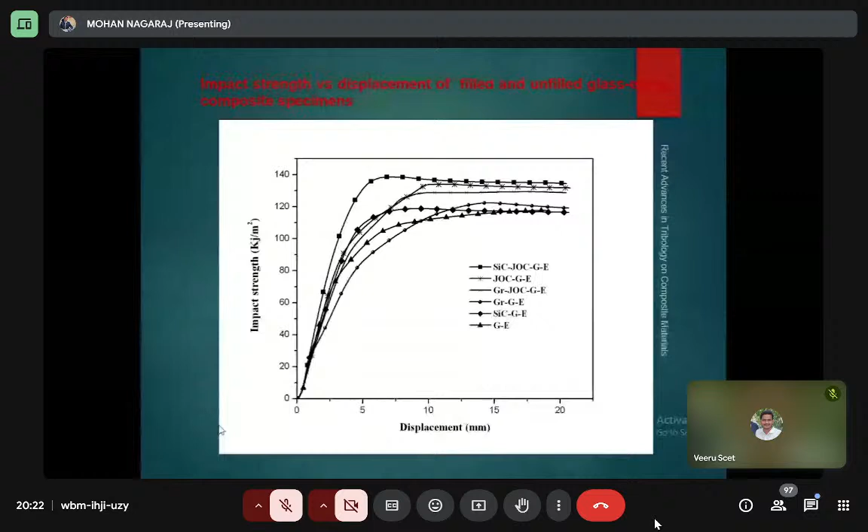This is the erosive test setup. We studied the composite materials at different angles.

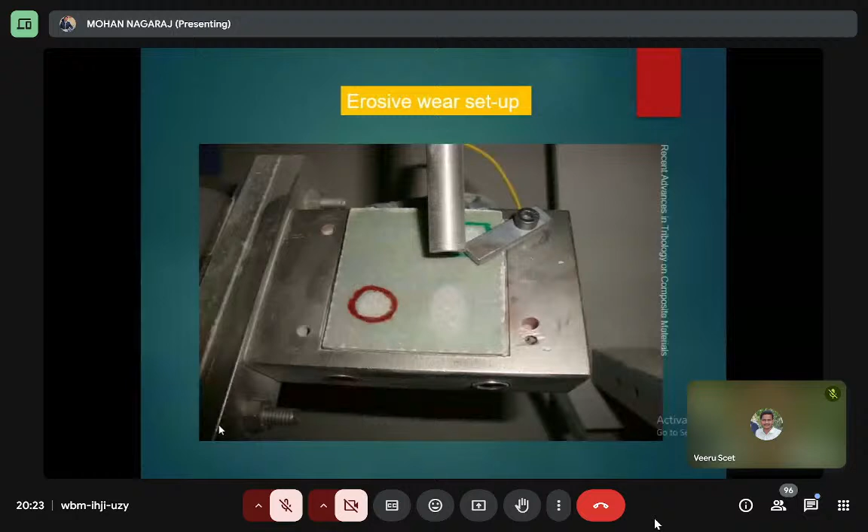These are the wear scars at different angles: 60-degree, 30-degree, and 90-degree angle for the graphite filled composite. The dark color is purely graphite filled, and the light dark color is JOC graphite filled.

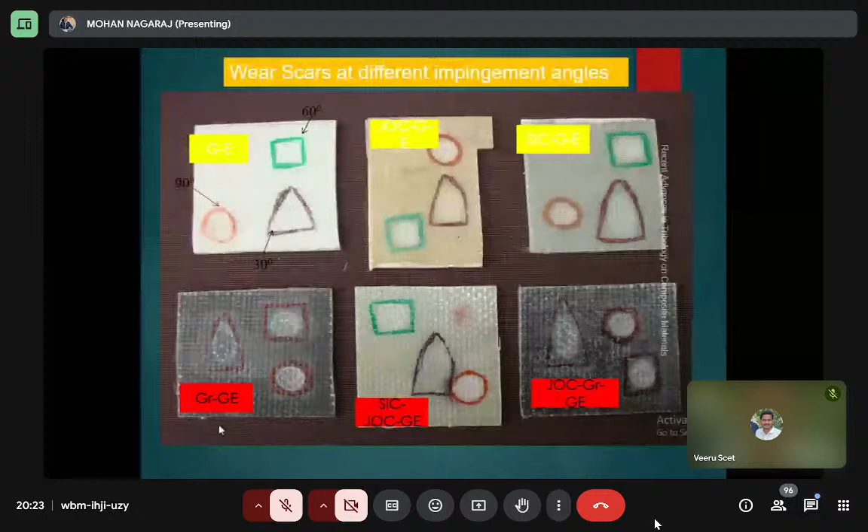The JOC filled glass epoxy, and silicon carbide filled glass epoxy composite, is white, while the pure glass epoxy composite is also observed. So here, we study the erosion rate versus angle of impingement at 90-degree, 60-degree, and 30-degree.

The erosion resistance in the sequence shows Jatropha oil cake filled glass epoxy composite is more erosion resistant compared to all other composite specimens. It is highlighted in yellow color in these slides.

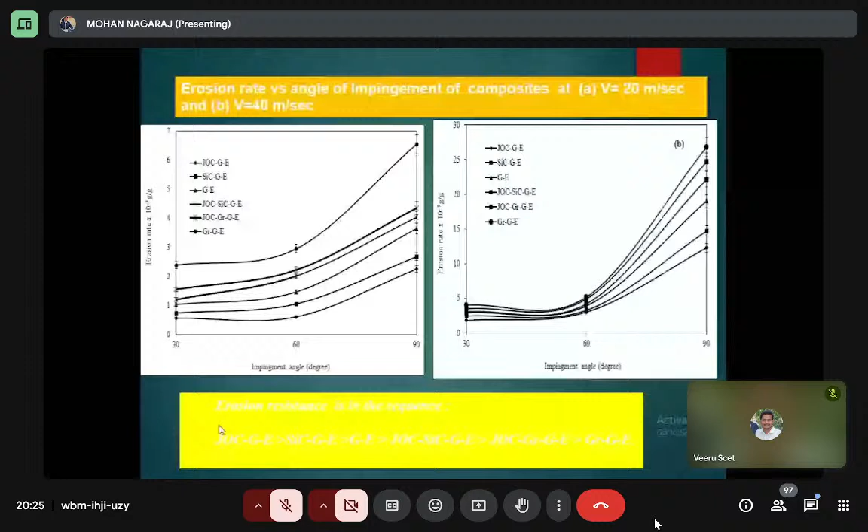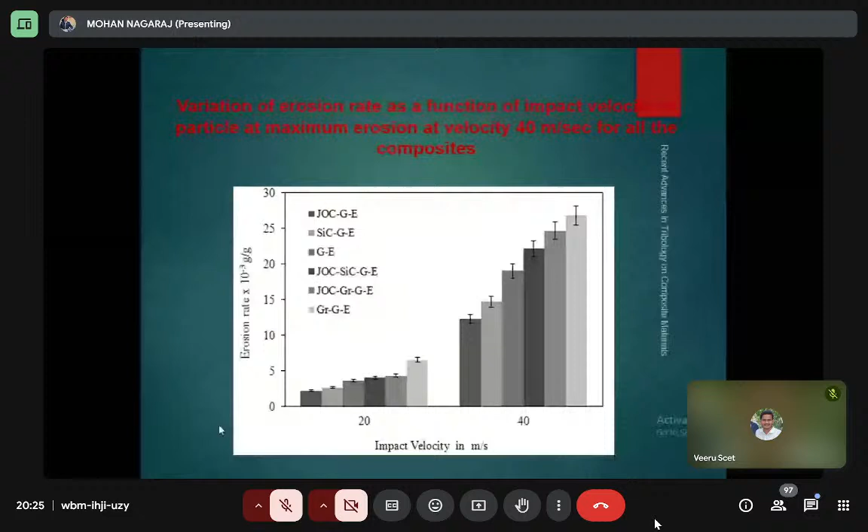More wear scratches, more fiber bending, fiber crushing, and cup and fiber tearing are observed. In the mixture with silicon carbide, more fragmented fibers are observed, and here also crushed and fragmented fibers on the SEM image surface.

The erosion wear behavior strongly depends on the impingement angle, and maximum wear is observed at the 90-degree impingement angle, as ductile to brittle transition takes place at the 60-degree impingement angle.

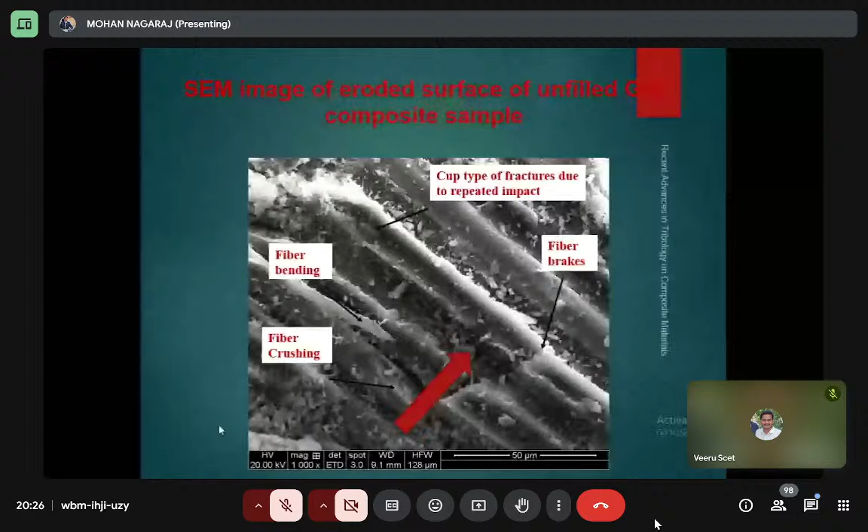Incorporation of Jatropha oil cake in the composite shows more strength and better bonding, which resists material damage. Also, glass epoxy with graphite filler shows the highest erosion rate due to weak bonding strength between the filler and the matrix.

With silicon carbide and oil cake filled composite, the presence of hard carbide in the glass epoxy composite gives considerable improvement in erosion resistance compared to unfilled, JOC, and graphite filled composites.

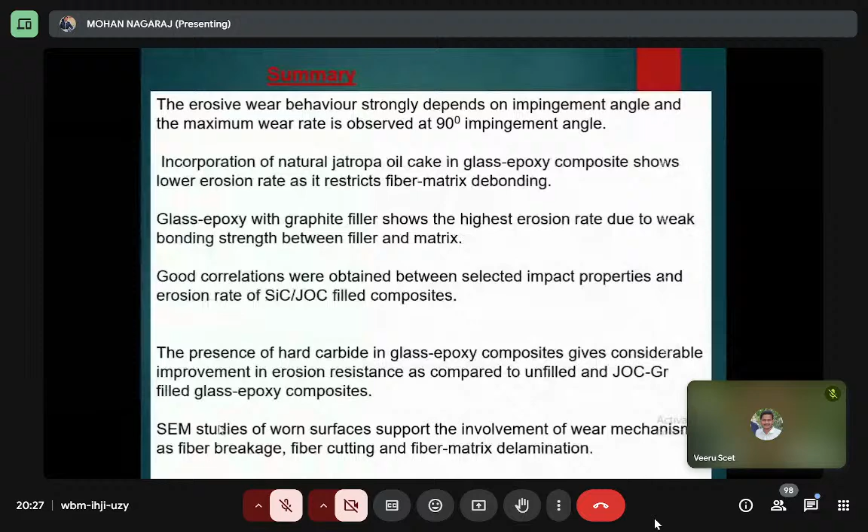Some images support the evidence of more wear mechanism observed. The materials are also being kept in a seawater environment, and testing is continuing on these materials.

Regarding Jatropha cultivation: if you use Jatropha, it can possibly be applied in different fields. Dr. Abdul Kalam sir said more cultivation of Jatropha oil cake is blooming, and the oil can be used for various purposes. The planning commission triggered industrial projection and improved cultivation of Jatropha, encouraging more use of it in technical science and technology fields.